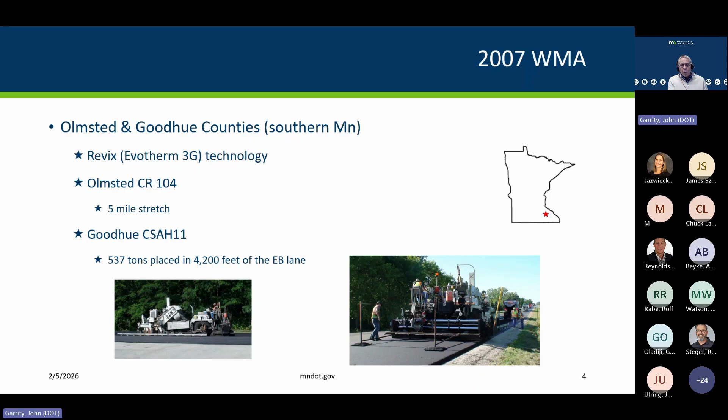But that just gives you a little bit of perspective on the MnROAD facility. But what we did back in 2008 was we constructed 6 cells on mainline. And again, we used the Evotherm product on these, and we included Warm Mix in all layers, the wear and the non-wear. It was a 12.5 millimeter size mix. The traffic levels out in this area are between 3 and 10 million ESALs. And then we had a PG 58-34, and we did include RAP in the mixture.

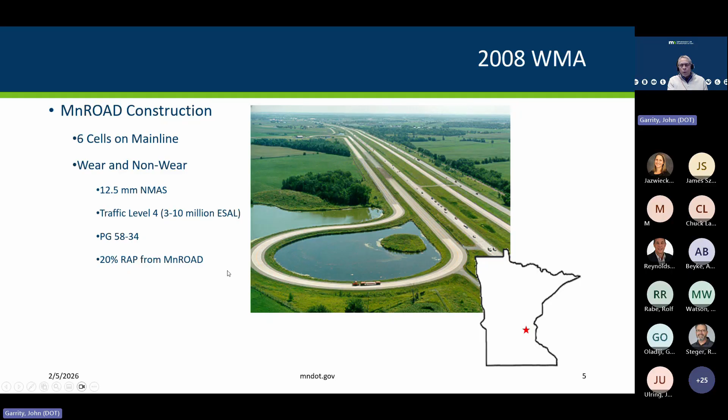All right, moving to 2009. This is that late fall project I was talking about. This was actually in the Minneapolis-St. Paul metro area, late fall paving job. The contractor needed to get it completed before winter, and there were some delays. And this was at a time when we were hearing quite a bit about the improvements that Warm Mix could give in terms of being a compaction aid out on the project. And we thought this would be a good opportunity to give it that try.

So we wrote a supplemental agreement up. At the time, we paid 60 cents per ton to add the Warm Mix additive. And what was really kind of curious on this job, though, was I think the contractor took to heart that the Warm Mix was going to act as a compaction aid. So they kind of changed their rolling operations. They actually pulled one roller off and went at it with a lesser rolling train than they had been using with the hot mix asphalt.

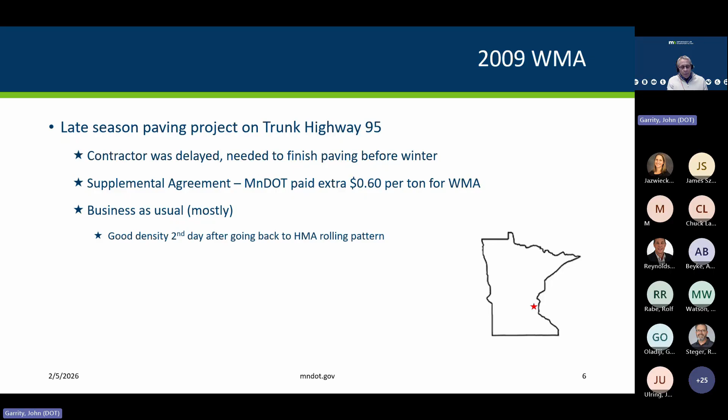And so the first day of Warm Mix paving in regard to density didn't work out that well, but they quickly discovered that they should go back to the same rolling train. So after that little mishap the first day, from there on, everything went well in regard to placing the mix as well as compacting it.

Now, in 2010, we actually developed a provision that was included in the contract when the contractor bid on the projects. And this was north of the city, about an hour and a half. And the provision that we had put together was, at the time, really referencing everything that the Federal Highway had done. And we mentioned that the contractor should just design the mix as they would under normal hot mix design criteria, but then include that warm mix to see if that affected any of the properties, and the approval was based off of the mix with the warm mix additive in it.

And at the time we were referencing again the Federal Highway. I think that was this highlighted website, the Federal Highway's warmmixasphalt.com. But also at that time, and some of you might remember well, even in your states, the use of shingles was quite large. And because this was a new thing for us to try, we thought, well, let's exclude recycled asphalt shingles from the mix. So we didn't allow shingles. We did have RAP in the mixes.

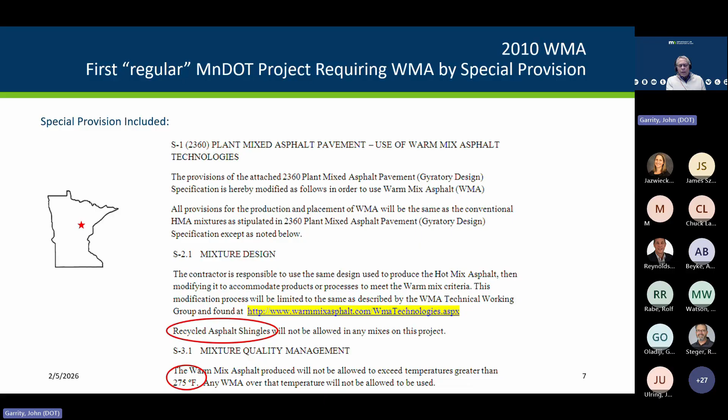And the one thing that we did do, which we didn't follow with future specifications, was we put that the contractor had to produce mix at 275 degrees Fahrenheit or less. And that was kind of a restriction that really at times can paint a contractor into a corner.

But at the time when we did let that project, we said just go to the federal highway site. Anything that was on their list would be an approved product that they could use in the mixture, whether it was an additive or a physical method.

And so in 2014, based off of that experience that we had developed from the projects previous to that, we did include a permissive spec or a permissive provision in our bituminous specification. So we said warm mix asphalt is an approved alternate to hot mix asphalt. And at the time, there were quite a few of the foaming systems out there. So we said warm mix can be manufactured through the use of foamed asphalt or a chemical additive process.

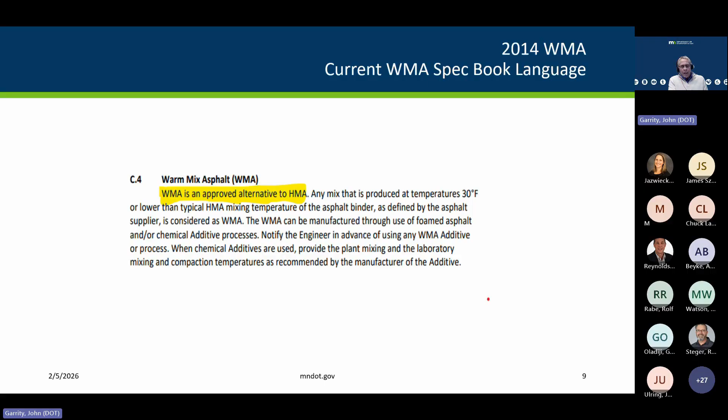The one thing that we really needed to know at MnDOT for our laboratory compaction was the lab compaction temperatures. So the contractor and the agency had to make sure that they were both compacting in the lab at the same temperature, so that wouldn't affect the mixture properties in a way that would have been from compacting at different temperatures. All right, then let's jump up to 2024.

And I was at a project engineer meeting, and I was talking with one of our assistant commissioners. And this was at a time when the soup du jour was low carbon transportation materials and carbon reduction methods. And we were talking about that. And he happened to ask me, how much warm mix are we using in Minnesota? And I gave him the timeline that we had just talked about on those previous slides. And I mentioned that back in 2014, we had included a permissive specification in our specification.

And his question was, okay, how many warm mix projects have we done? And I said, well, I think I could probably count them on one hand. And in the same breath, he said, well, why so few? And I said, well, that provision is permissive. However, we did not include a pay item for it. And so I said, my guess is that the contractors just don't want to pay the additional money to include the warm mix additive. So he said, well, how could we promote or increase the use of warm mix?

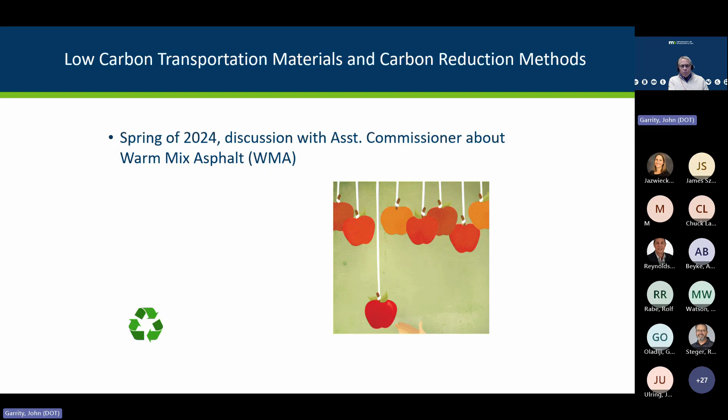And I said, well, an easy way would be to just put a pay item in for the warm mix. And he was thinking a little bit, and he thought, well, how about if we went with an incentive? And I said that would work equally well and might be a better way to do it. So with his direction, he said, okay, see what you can come up with for a provision that allows the use of warm mix and will pay an incentive for its use.

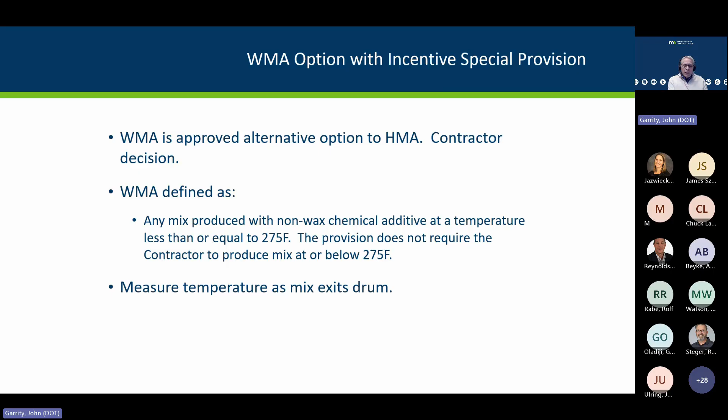And one of those, first off, it is an option when it's included in the contract. It's an option for the contractor to use it. They're not required to use it. And then we define warm mix as any mix that's produced at a temperature of 275 degrees or less. And up in Minnesota, because we have the cold weather, we said we don't want a wax chemical. And then in terms of measuring the temperature, we measure the temperature as it exits the drum.

Now, many of you are aware that typically with an asphalt plant in the morning, we have to get the cobwebs out and get the iron warm. And so we decided to include in this provision that for the first 100 tons of production in the day, the contractor could produce at hot mix temperatures to get the bag house warmed up and get all of the other equipment running well.

And we felt it would be most fair at that time to then include that 100 tons in the inclusion of the incentive if the contractor was making the warm mix. We felt that just because of the operations of the plant, where they really needed to start the morning at hot mix temperatures, that was something that they couldn't work around. So we thought that was fairest.

And then on our plants in Minnesota, we require that the plant reports every 20 minutes different information such as the cold feed rates and proportions, the added asphalt cement, as well as the mix temperature. So we said that we would grab those mix temperatures from that recordation system that's printing every 20 minutes. And then we were afraid, what if somebody starts spiking results just to get that average where it is? So we did put a clause in there that no incentive payment would be paid if more than 10% of the daily discharge temps were above 275 degrees.

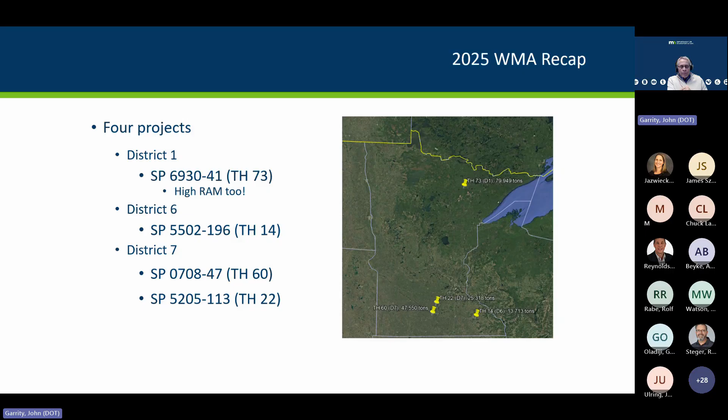And this is our warm mix summary from those paving jobs. The things that we thought would be interesting to look at, first of all, was how much of the possible incentive was earned on these projects. And again, our concern was, we were really supportive of using the warm mix, but we didn't want to compromise density on the project. So we really wanted to look at the possible incentive earned, the mixing temperature, and what the density was out on the project.

So on that Highway 73 project that had 80,000 tons, the contractor got about 52% of the maximum possible incentive. The average mix or plant temperature was roughly around 255 degrees. And you can see they did quite well on the density values. In Minnesota, we have a mat density requirement as well as longitudinal joint density where we're cutting cores.

On the Highway 60 project, the contractor was able to get about 65% of the maximum possible incentive. And on that project, we see two different divisions in the mix there. They had both wear and non-wear mix on that project, but the plant mixing temperature averaged at about 260 degrees, and you can see that the densities were quite good on that.

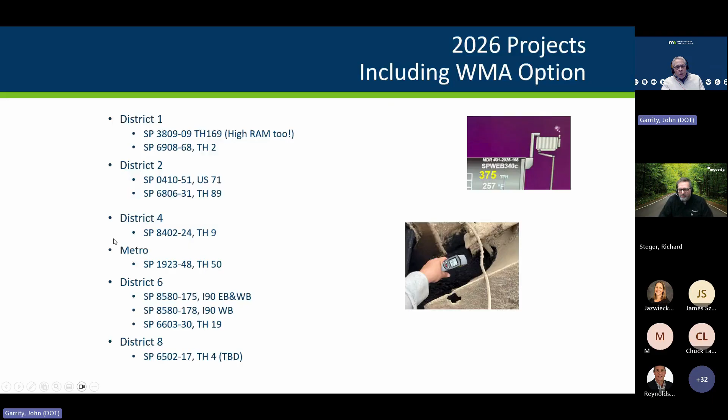I have a question from John where he asks, how do you prevent a contractor from artificially making the HMA high so that they can get more money back from the incentive? And I assume that means HMA higher temperature. Yeah, and that's a good question, and that's why we included this in the provision too.

So what we do is on that spreadsheet that I mentioned, that has some logic in it. So it's looking at the mixing temperatures, and if it finds out that more than 10% of the daily discharge temperatures are above 275, then they cannot get the incentive. I guess it does say no incentive payment if more than 10% of the temps are above 275. So we think we were able to prevent that through that. So I hope that answered the question.

I think so, yes. Let's move on to the next question from David. In Minnesota, are contractors adding the compaction aids or warm mix additives at their own plants? And he goes on to say, in Florida, we have terminal blending of these additives only. It's surprising to hear the best densities being achieved at the lowest temperatures that one company had attempted, which you mentioned, which was on slide 19.

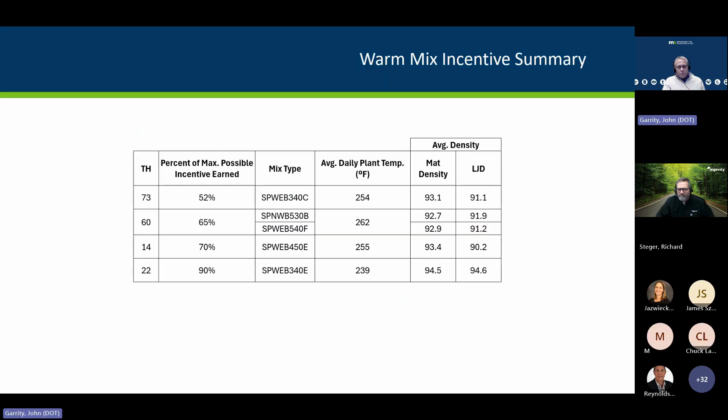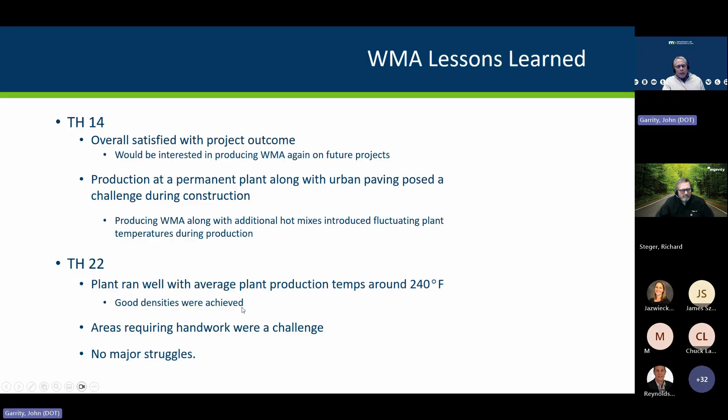Yeah, on all of the projects that we had this summer, our provision does allow the addition to be either at the plant site or at the manufacturer. And I think in all of our cases, the contractor just opted to add it at the plant site on their own. However, as I mentioned, that high RAP or high RAM additive, the EvoFlex, was being added at the terminal. And what was the other part of that, Richard?

He was questioning about, it's surprising to hear that the best densities were achieved at the lowest temperatures. Yeah, I was surprised about that, and in fact, that was one of the things I gave Craig Reynolds a call from Ingevity on. I said, Craig, contractors are actually getting better densities with the mixing temperature down, and Craig said that is indeed true. I'm not sure if you can get on or not, Craig, and mention that or if that's appropriate. But yeah, I did question that, and talking with Craig, he said that the chemistry of the warm mix additive did indeed make it work well at cooler temperatures.

Yes, Craig, jump on real quick. Yes, John and I talked about that, and obviously Evotherm is a compaction aid, and it does help achieve density at lower temperatures. We saw that throughout all the projects, but it was nice to see, particularly the one running at 239 was the best. And it was really exciting because a lot of states and agencies are looking at longitudinal joints, and we actually achieved, I think it was 93 or 94 on the joint with the 239 degrees. So it's something to keep in mind.

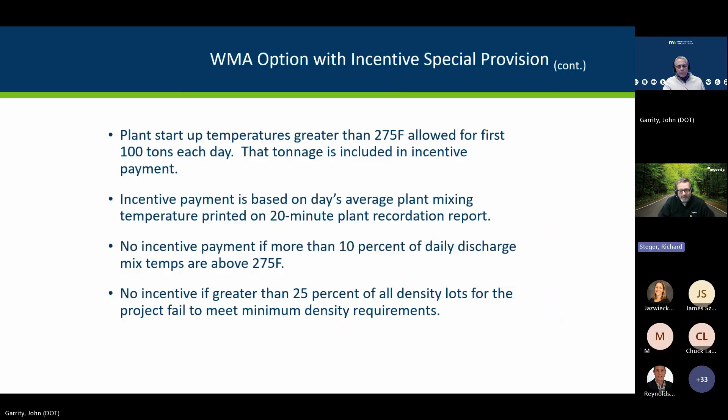One other question I had, John: I think you mentioned early in the presentation that the laboratories, the contractor, and the agency were trying to compact mixes at the same temperatures when you use the warm mix additives. Can you elaborate on how you went about selecting those temperatures, or did the contractors just pick a temperature they'd run at? I think that was actually working closely with Ingevity. I think Craig was part of that discussion. I don't know what the laboratory compaction temperatures were, Richard. Craig, do you recall what was the basis for that laboratory mixing and compaction temperature?

A lot of them started off right around targeting 260 just to keep it below that 275. Then I think some of them were presenting to MnDOT to go down to that 240 number once they got comfortable with it. They were essentially sharing what they were doing out in the field to make sure that when MnDOT brought it back to the central lab they were compacting at the same temperature. Okay, very good.

Got a few more questions coming in on the Q&A line here. Frank is asking, what was the percent of Evotherm used in the oil or the asphalt? Craig, I don't remember what the percentage was. It varied, a couple different jobs and a couple different types of oil and projects, but it was between 0.4 and 0.5 percent of total AC.

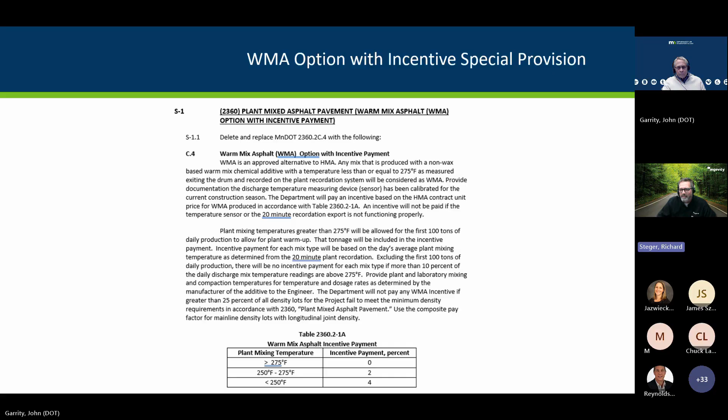Oh, well, thank you. And a great question. I think that would come to the performance benefit. Going through the plant we have reduced aging, so we should see reduced cracking on the pavement. Any way that we can minimize the intrusion or infiltration of air and water is a benefit to our pavement structure, long-term performance and durability. And I think that we're able to improve the cracking characteristics through this reduced mixing temperature.

Okay, thank you. Still a couple more questions coming in, John. This is a question from Deb, and he asks, can you please comment on the scope of using RAS with reduced temperature warm mix? Have you tried it at all? Sorry, Richard, was it RAS? RAS, is what he wrote, yes. I have not seen RAS used in Minnesota for over 15 years. I think the supply dried up. I guess I can't really answer that. I just don't know. Okay, no, that's fair.

Then he has another comment, and I do know Deb. Deb and I've worked together in the past when he was in Oklahoma. His comment is that in our field trial effort, which is a low carbon transportation materials project in Oklahoma, we also saw better, although very small, density levels for reduced temperature chemical warm mix in comparison to the hot mix. And he added that they produced at around 250 degrees Fahrenheit. So that adds to some of the questions you got earlier about how they got better densities when producing at lower temperatures. Right. So just a little follow on to that.